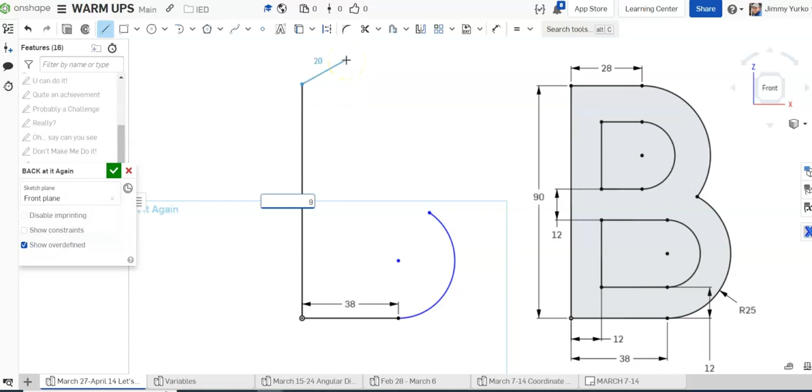Again, that's a vertical line, and I'm looking to make that 90 millimeters, so 90. Just be sure to type the 90 in prior to your next click. And we're going to go across about 28, and type 28. You have to type the number in, otherwise the dimension won't appear, and if the dimension doesn't appear, then it's still undefined. So now we're going to come down here. We're going to draw the arc. I want to have an arc coming all the way down to the other one. So bring the mouse back to the endpoint that you last clicked on and join those together.

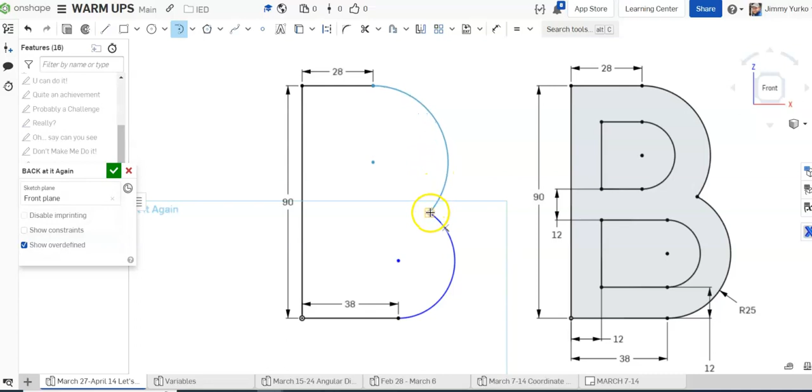All right. These are now able to move around, and you can see that because these are tangent arcs, the center points vertically align with the endpoint of the line that you are tangent to. And we want to get this so the lower bulb is slightly larger than the upper bulb, and there you have it. Now I would love to just hop and choose the offset button, but that is not going to work. If I try to offset this, it's not going to work out the way you think you want it. So I'm going to go ahead and actually draw.

So let's go ahead and try that offset. See what happens. Come in, and that looks pretty good. But now whenever I cut off here, these two circles can't be offset because at the distance we're going for, they won't touch each other. And then the shape just won't close. So we're going to escape from the offset tool, and go back to our line tool. So offset is not the way to go. And we're going to go ahead and start with the bottom opening for the B.

So I'll just draw a horizontal line. Make sure that line, you can see that it lines up with the tangent point and the center point. So click and release. And I want to pull all the way around. I really want the center of my new arc and the old arc to be the same. I can't do that in one step, so I'm just not going to worry about it. I am going to make sure that I am vertically aligned, and then I'm going to move across to the other side and vertically align the endpoint, and then close it up.

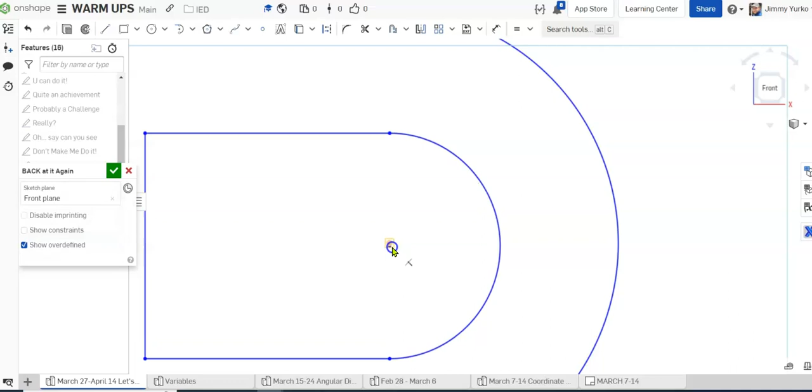Then what we'll do, we'll zoom in on that, and we'll grab that loose center point and release it whenever we see the yellow constraint. We do the same thing on the top. So again, line tool. This time I'll align it with the lower opening. As far as the length goes, it is not going to be the same. And then I'm going to switch that to my tangent arc tool. As we've already established, it is not going to be

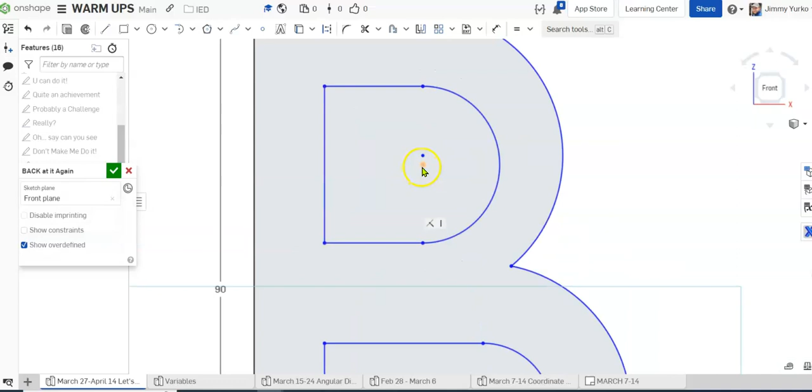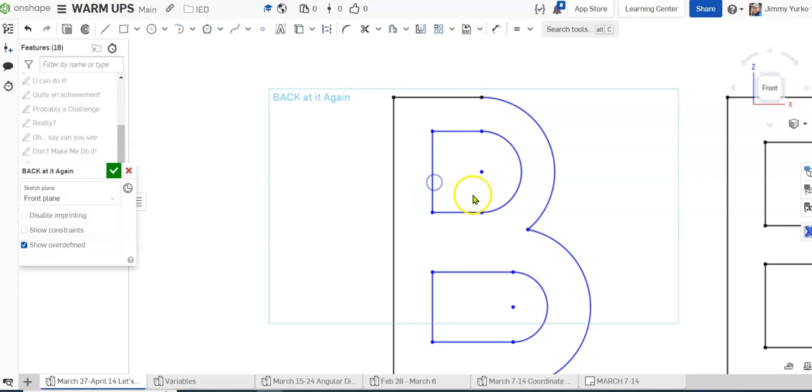aligned. Of course, look at this, that actually needs to line up. I come across and line that up. Now, this point here, I did not align the first time, so I want to make sure I get that right. And then drag the center point so they line up. So now, you look, when I move this, they all move together. The holes and the outer arcs have the same center points, and the left side of the holes align with each other. Got all of the constraints applied except for the dimensions, so it's time to go ahead and apply

dimension to this. There's a 12 millimeter gap between the two upper and lower holes. There's a 12 millimeter gap between the left and the back. We have a 12 millimeter gap between the bottom and the holes. And let's see what moves. So to figure out what you haven't done yet, you click on things and try to drag them around, see what moves.

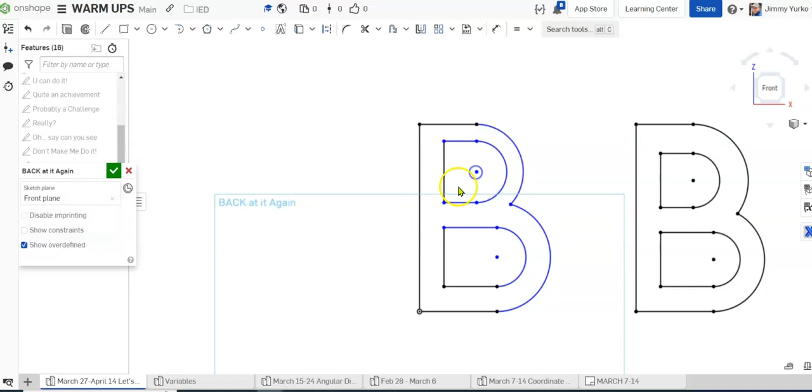Right now, the only thing that's moving is this up and down, so I'm missing a constraint for the height of that component, which is right here, 12 millimeters. So, oh no, it's already there. The radius. I'm missing the radius for the circle. So that radius is 25 millimeters for the lower circle, lower arc, not circle. And the upper and lower, these lines should be equal. So have the equal constraint and make this line and its corresponding line equal to each other.

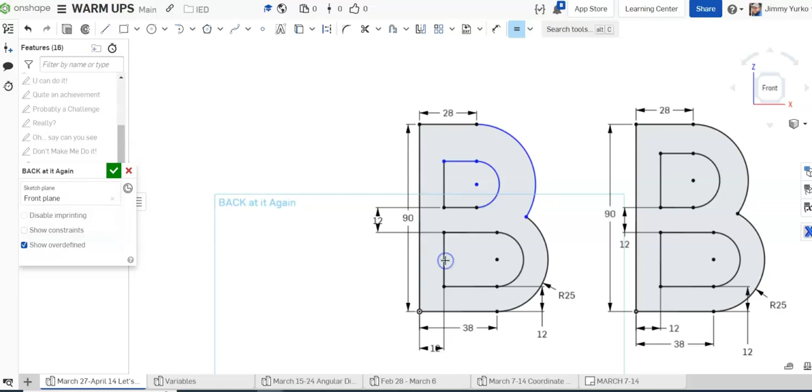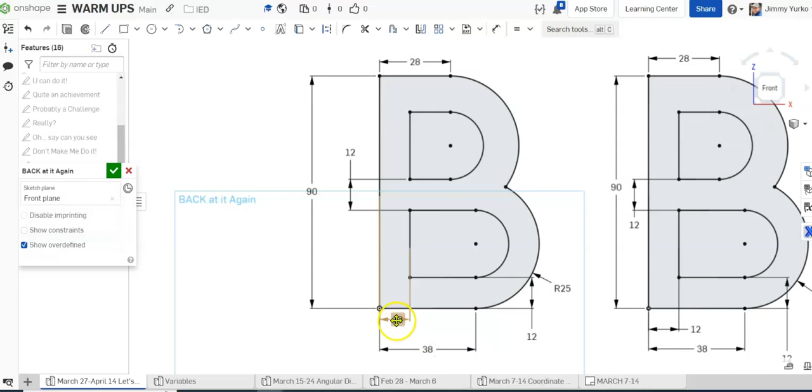Now, at this point, everything looks pretty good. I do have one thing to point out, and that is that while the software doesn't care where you put your dimensions, your eyes do. So try to put your dimensions even in sketches. Get in the habit of putting those with the smallest dimensions on the inside and the largest dimensions on the outside. Try to make the tails and leaders not be too incredibly long so that it's close to the model and crosses the model as few times as possible.

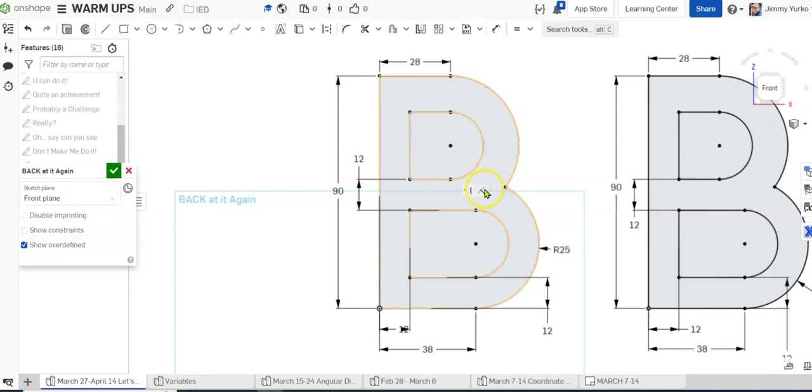And here you have it. We are back at it again, and we created another B. So excellent job.